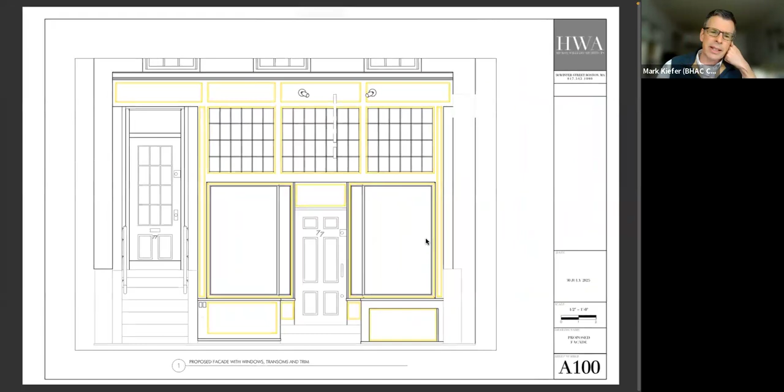Okay, hi Bridget, please go ahead. We've got the plans up on the screen here, so you can probably see. Can you just give us the briefest of recaps, for our commission's benefit and the public, as to why we're here and where we are in this process? Sure, go ahead.

Okay, so this is the work that was done on the store on the facade previously, and our application seeks to change this back to something closer to what was there. I think one of the objections of the commission was that the detailing was not correct, and the elements of the storefront were larger than they should be. So if you can show our proposed drawing.

Bridget, while we're doing that, I think Patrick's here by the way. Just again, to quickly recap for the benefit of the commission, to remind everyone: there were other aspects that were previously approved, an extension of the signage, some lighting of the signage. And I think we are getting closer to a revised concept for the storefront. So please go ahead.

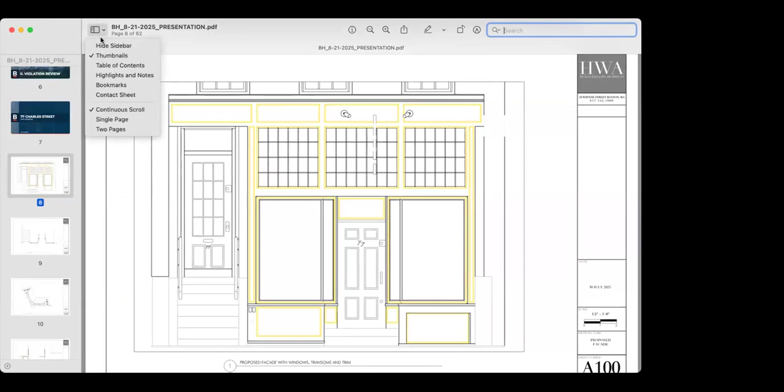In fact, it's even better because it's true divided lights, double glazed, whereas the original was, I'm sure, single glazed. So that was something we worked out with JB Sash, and I think others probably would have been able to do it too, although they've been especially constructive.

But on the lower part, that was much more difficult. That corner post—the builder and his engineer had an idea that post needed to be much, much larger than what our conclusion had been after studying it. Our feeling was that, in fact, there was no load to speak of on that corner. It was really a matter of glass meeting glass at the corner. Nonetheless, it is double glazed for many good reasons.

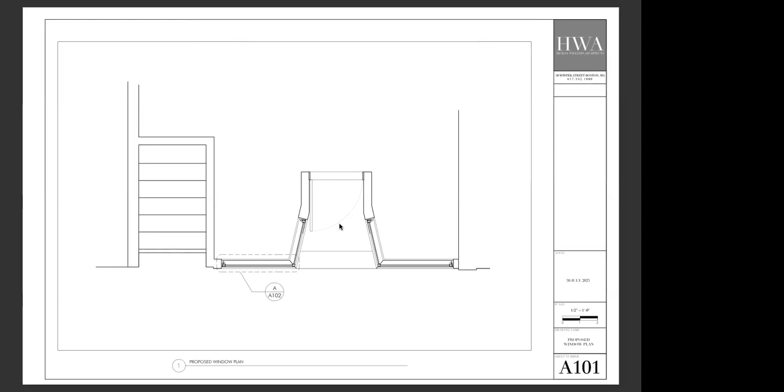So there's a little bit more complexity in such a joint in double glazing. However, we've pretty much been able to achieve a similar appearance to what was there way back in time, which was approximately a fair amount under 2 inches in width in each face of that corner post. There's also the dimension of the sash, but the post we were able to reduce by pretty close to a third.

This relieves the design of something that many people in the original hearing thought was disturbing and aesthetically unacceptable, also in contradiction to the historical nature of that facade. So I think we've gotten back to something that, even though there's an aspect of artifice to it, because the double glazing is a very different proposition, we've pretty much been able to get it down to a very slender corner.

There are some other differences from the very old design, and that is, rather than having a single transom that went all the way across, we have divided that into 3 parts with separations between them. It was a bit pragmatic to have pieces that could be easily done, but also proportionally relate to the rest of the building as it was and as it is. So it's a relatively minor change, but one that, in our judgment, felt true to the overall composition.

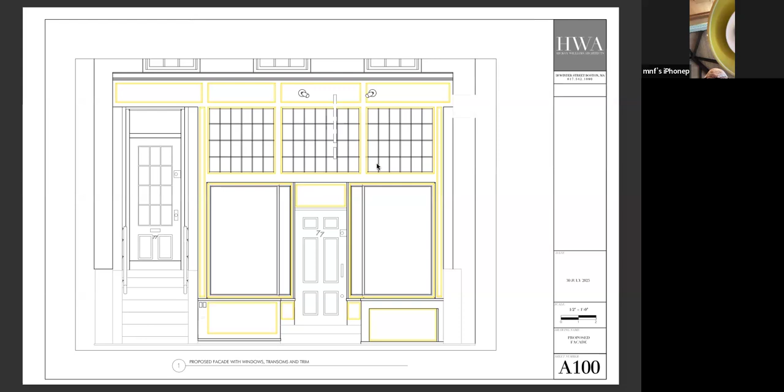I have a question about the transom—you show it 4 lights high, but I thought the image shown before was 3 lights high. Am I wrong? No, you're not. I actually think what we would like is for the transom to be 4, which has a lot to recommend it, since they're basically all square lights. It looks very nice. I'm happy with that. I believe earlier it was 3 lights, but the amount of documentation we have is fairly slender, and 4 lights high seems rather good.

We've looked at many—oddly enough—Irish pubs in Boston, but also in Dublin, and the transom is quite a feature there. It's historically interesting because, even though Jack Kiley and Julianne both very much identify as Irish, the building itself has been many different things over the years, and not, as far as we know, an Irish pub. That's very dear to them if we can achieve something related not only to a pub in Dublin, but also some of the really nice, beautiful Irish pubs in Boston, such as on Upper Beacon Street, and in a number of other locations where the transom is sometimes a feature, but also has a rather delicate polychrome approach.

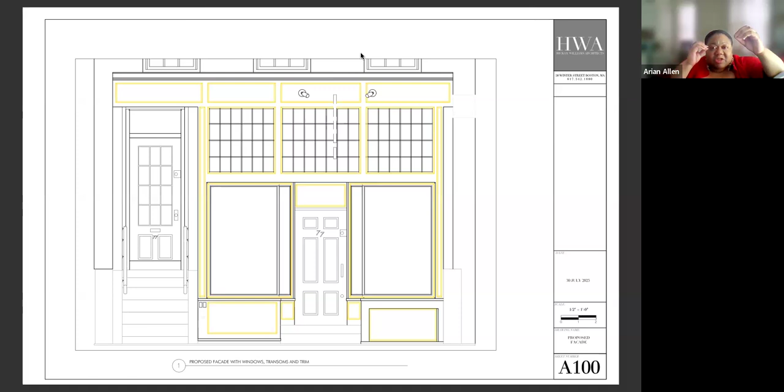I'm sorry to interrupt, I've been dying to ask this question. I appreciate your presentation, but this is a violation, correct? Right now we're doing a violation review. So let's go, because as a presentation this is great, but I want to concentrate. Let's get down to the nitty gritty of it.

What is the actual violation? Is it something that you decided to do on your own, that you did not bring? No, as I said earlier, we were not involved with the project at all until well after the violation hearing. I truly believe in the sincerity of Julian Kiley's approach, that this really was a quagmire into which she was drawn without any intention on her part. When it was called to her attention, she took it very seriously, and she sought out me because of my experience, our company's experience with the historic architecture of Beacon Hill. So our role has been to try to create, not just repair, but to create an appealing facade that draws strongly from the history of this building and others on Beacon Hill.

But to the commissioner's question, what was the actual violation? Let me just get to the screen. So the violation is everything that Patrick is talking about right now. They rebuilt the storefront without permission, basically. It was a repair? No, that became that.

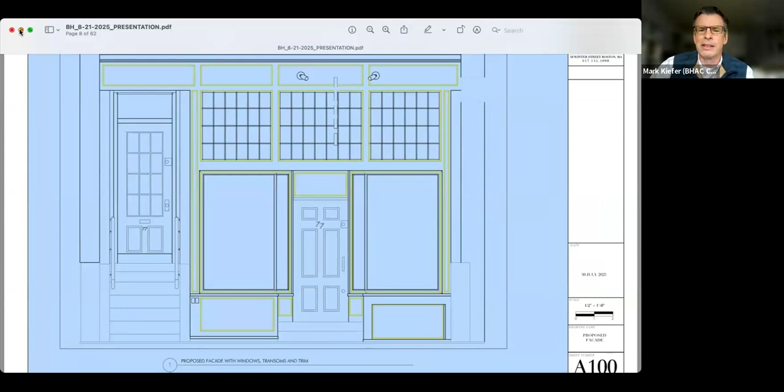What about the transom, that's part of it, correct? Yeah, so the entire storefront is up for discussion because everything was replaced. So now we are visiting the entire storefront and legalizing it essentially, and Patrick is presenting his plans to do so.

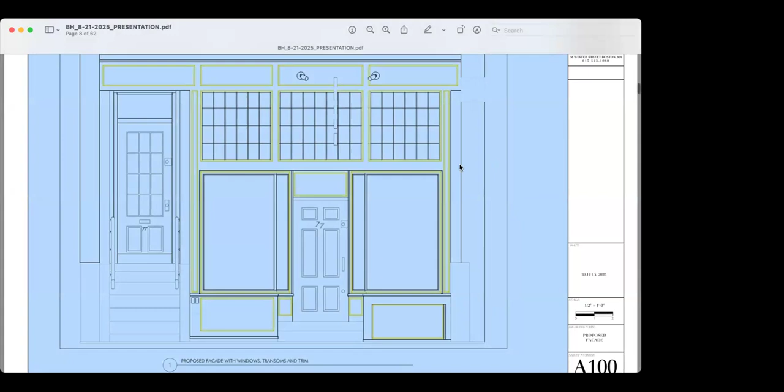And actually, well, I'm not surprising - the commission was very articulate about some of the things that seemed very distasteful about it, and Julian Kiley is very sympathetic with these criticisms. One of which is that the posts at the corners of the corner windows are excessively large.

Unfortunately, the engineer and the builder on their own felt that these were necessary, but our analysis says they're not. That was among the criticisms. I think overall people felt that things were very beefy.

Do you have a detail of the actual corner as you propose to reduce it? That's the critical detail for me, to look at how you diminish, what the diminished corner looks like.

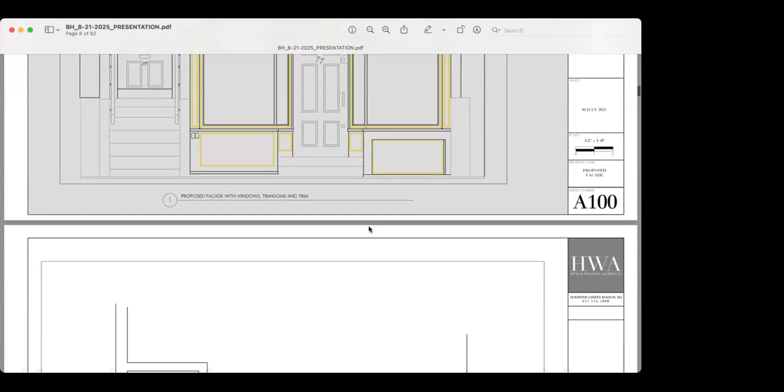I have to admit that has not been confirmed. I believe that that is very, very close, that we expect that we will have. What you see there is drawn as 1.25 inches. It's possible that it will be slightly larger than that, but we're working on it.

At the time we did this, we were working with very good sash companies around Boston who had even done some of the sash on Charles Street. But those windows were in fact all single glazed, with a type of white metal mullion that is no longer used, and the narrowest they could produce was about 4 inches in aluminum. So what we're going for, even though what we're showing there, we felt it would be possible to have a custom made metal sash.

But in talking with JB Sash and Marvin, we believe that we can make a wooden corner that is very, very close to this in dimension. So it's 1.25 inches on each face. That's correct. But that's considerably less than what is currently mocked up on the site.

The existing is around 4 inches, slightly larger. It looks like a 1x4, and inside it has I believe two 2x4s, but by the time it's cased, it's significantly larger than that.

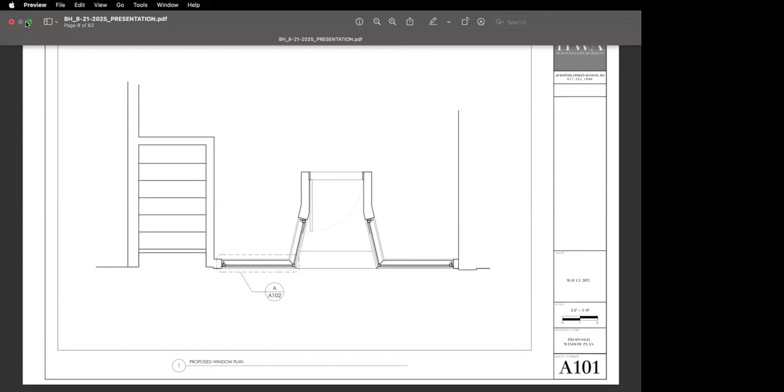What do you imagine the original post was at the corner? Was it round? I actually just by looking at the way these sash were made, and one can even see just down the street, there are several mullions that appear...

made of white metal inside and out, and the glazing either butts or sometimes is held by those mullion pieces. There is one, it's actually really hard to see, but it's about 3 buildings down. I believe it's at upstairs, downstairs, and it's somewhat canted. So it's the closest to this, and it's not really possible to tell what's inside of it, but it would appear as though, again, it's a couple pieces of white metal that have been sandwiched, holding the glass.

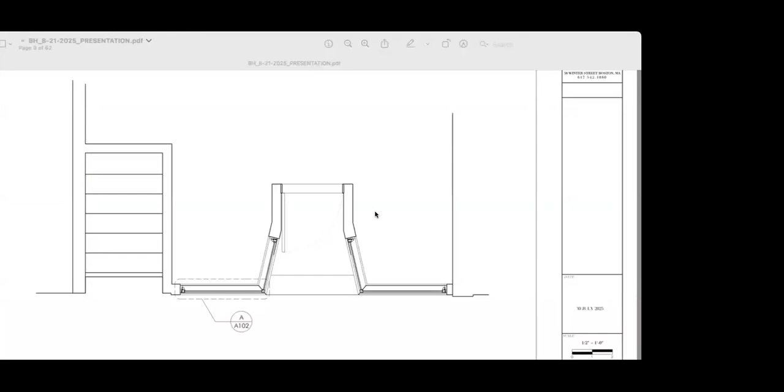But it's single pane glass, so it's a little bit different than what we're doing. What is the thickness of the double pane glass you're proposing? Well, what we're imagining is that the double pane will be 1/4 inch of glass, 1/4 inch of vacuum space, and 1/4 inch of glass. So 3/4 of an inch. Correct.

So you're ending up with still a pretty fat mullion at the corner, but diminished. But actually comparable, somewhat comparable to the appearance of the ones down the street. It's overall definitely beefy. It is a corner, it doesn't have any load bearing requirements.

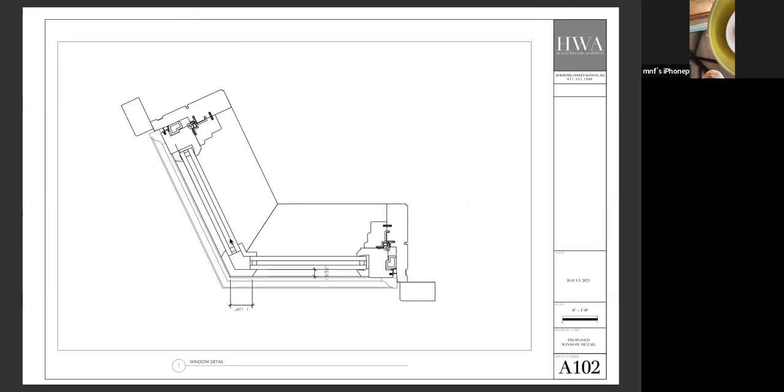I understand. I'm just talking about why it's still as fat as it is, and if the double pane glazing is creating that condition. I think that's a fair statement. I think that the double pane does add to the overall massiveness of it. However, from the point of view of what one can see of the corner mullion, this may be comparable.

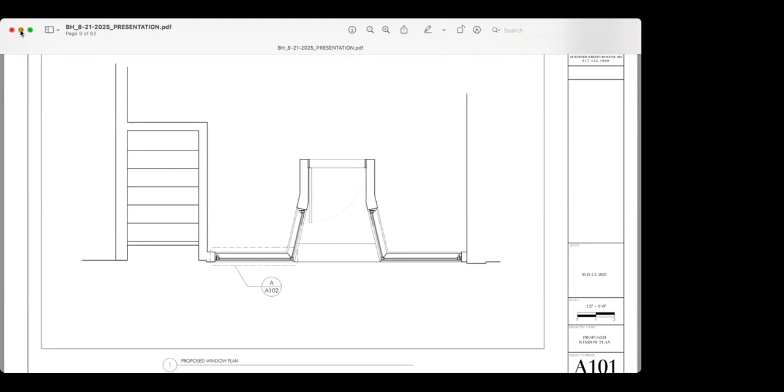I mean, the optimum solution to this problem would be that the corner posts be in metal. I would have liked that. And we did talk with many glazers, but I couldn't get anybody to build it. What I could get was Marvin and JB Sash, who worked very closely together, and basically felt that they could do it in wood.

Now, if it comes to it, if we can do it, what I would like is to have a wood post with a very thin, 16th of an inch, maybe even less, of flashing that wraps it to recreate the metal appearance previously, but also I think it would actually help protect the post, since that situation is one of very high traffic. People handle it, and it would be best if it had some degree of metal protection, even if it's not metal. The design that you see, I thought I could have that fabricated out of solid metal. It didn't seem to me like a huge project, but I have not been able to find anybody who will do that for me.

Okay, thank you. So, to sum up, I think the bottom line is what was there before, the actual wood was thinner than what they're proposing, but there was a pretty wide piece of metal flashing on either side. So the total expression of the thing was probably bigger than what they're proposing. So it's six of one, half dozen of the other.

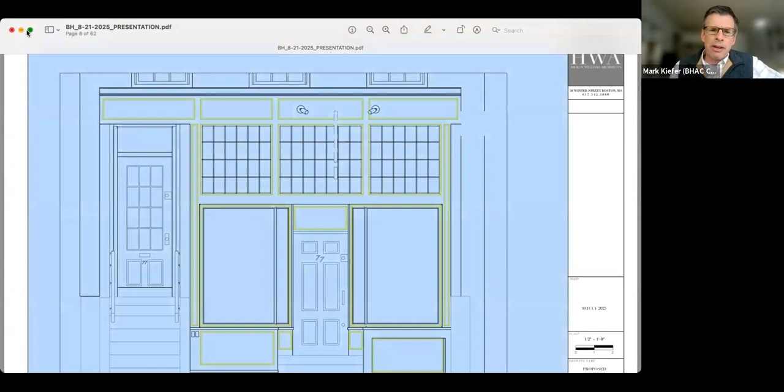Okay, thank you, Patrick. We'll come back, we'll circle back and debate this, of course, but we appreciate all the information and very much your efforts to be responsive to our concerns and make this thinner and try to restore at least the spirit, if not the exact design, of the transom lights. Again, we'll talk the specifics in a moment, but for the moment, why don't we take public comment?

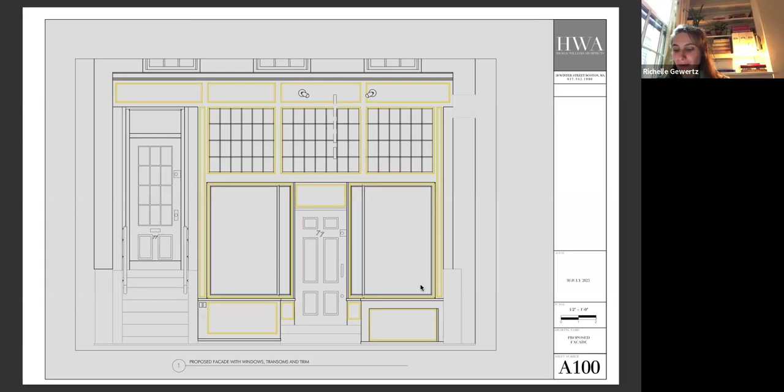Richelle, go ahead. Hi, Beacon Hill Civic Association. We oppose ratification of the current and proposed alterations to the unapproved rebuilding of the storefront, as it still remains changed into a completely different style, specifically a British pub vernacular. The modifications and proposed modifications are not an appropriate architectural change to this building and do not satisfy Guideline A4, do not duplicate the original trim as specified by Guideline F2, and do not match the original features and composition, design, color, texture, and other visible qualities as specified by Guideline A2, especially the tripartite zones with golden borders that do not evoke the prior uninterrupted band of fenestration condition to meet Guideline A3. We do not appreciate the return to thin corner mullions at the storefront. Thank you.

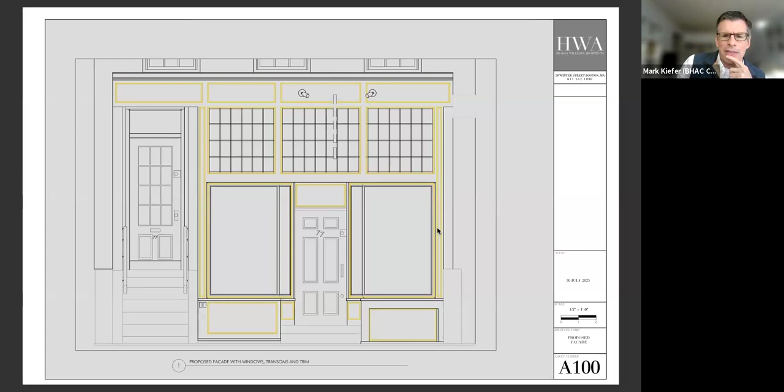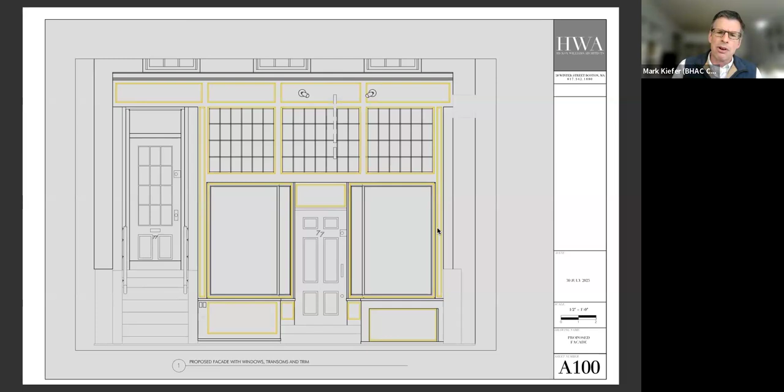I guess, to my view, I think I'm satisfied with the result that we have here, particularly given there's the original wood element in the window, but then there's the effective width of it, which was made considerably larger by the flashing on the inside. And I think what we've wound up with—I don't know for certain, but just looking at the images Nick had up there and the drawing we're looking at right now—I think the net effect of the proposed rework of this is one that gives us an effective width that's pretty close to what you saw before, given the wide flashing on either side. This, I think, frankly, would be a neater appearance if nothing else, because that silver flashing kind of stuck out from the otherwise black wood element and so forth. But with that, let me ask my colleagues here.

Commissioner Feingold, you were just talking about this. Does anyone have a different view of this, or what do you think of Patrick's revised design for this corner? Any dissenting views?

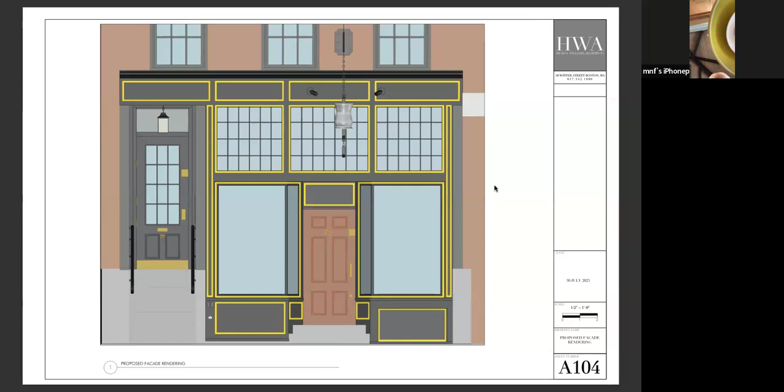This is Feingold again. Yeah, please. I had exhaustive questioning before. I think he's done the best he can, and I think it's fine. Yeah, that's kind of where I come out as well, under the circumstances.

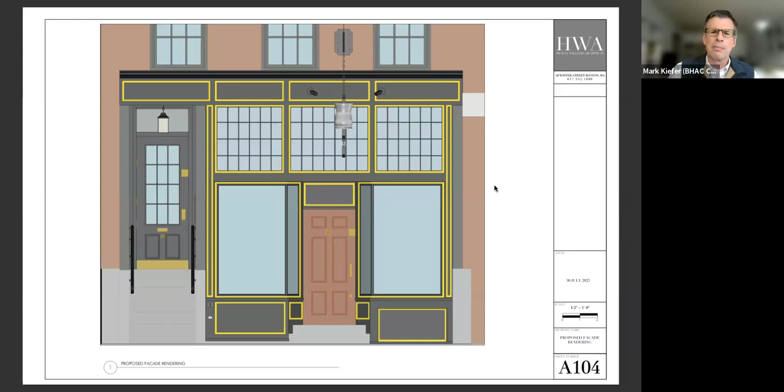Let me just say, I should have said at the outset, this is a violation, and I appreciate the comments of the Civic Association wanting to be pretty precise about how we treat this. But I will say, for my part, I don't believe, in all candor, that there's anything particularly important or historic about the fine details of this storefront. I think the fact that it is a storefront matters tremendously, and I don't believe we would be contemplating something that would rework the building to remove the storefront, or otherwise restore it to an original, residential configuration.

I think the question here is, how important are these details? We've just worried one of them pretty significantly, which we thought was very important, which is the delicacy of some of these elements, which Patrick has taken significant pains to get us closer to. I think that's absolutely a step in the right direction. Because we're not dealing with, in my opinion, a particularly historically significant storefront in its fine detail, I don't believe, as a matter of principle, that we ought to cement in amber a not particularly successful design.

So I think there is room in this case to try to improve it. And I think the transom light, as we discussed in the prior hearing, is an attempt to restore historical detail, or at least make an homage to what might have been a more fully expressed historical detail, but for which there is evidence there was some fenestration in the transom. I think there's room to improve this.

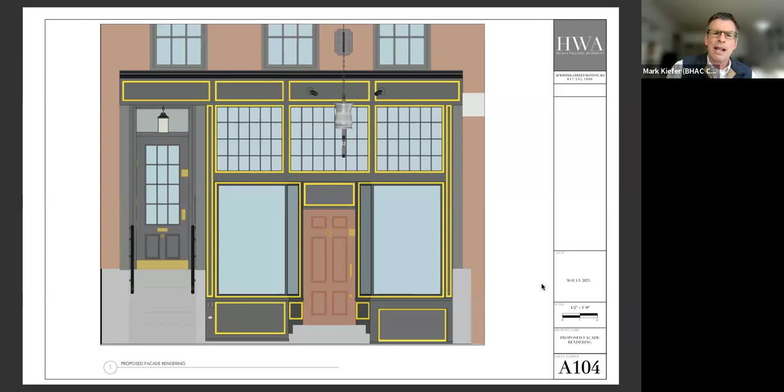Specifically, I'm fine with the idea of bringing back a transom light. I think we've already agreed on that, it's just a question of how to do it. Patrick, Nick and I were talking, and I appreciate your comments earlier about how many lights there should be. I won't speak for Nick, but I think we were kind of persuaded that a treatment more analogous to what's next door, where it's one small light, a double light, and then another small light, might be less busy and more appropriate.

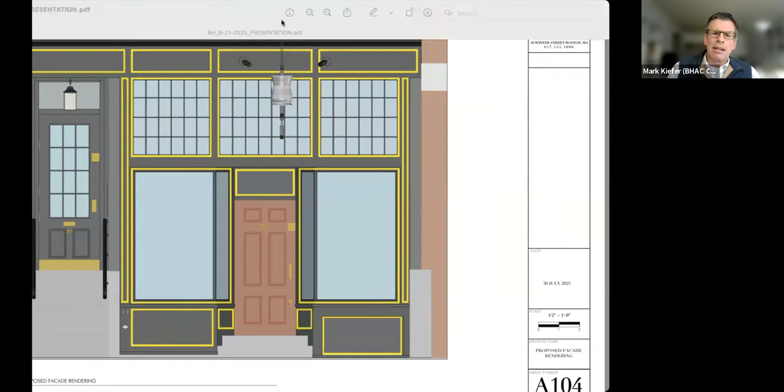I think this is informed conjecture, but maybe we can get the photograph back up again, Nick. The building next door, these storefronts, we can probably conjecture were added at the turn of the 19th to 20th century. That treatment of the square light, then a double light, then a square light is at least vaguely evocative of the kind of arts and crafts style fenestration you see in a few places elsewhere. Thanks, Nick.

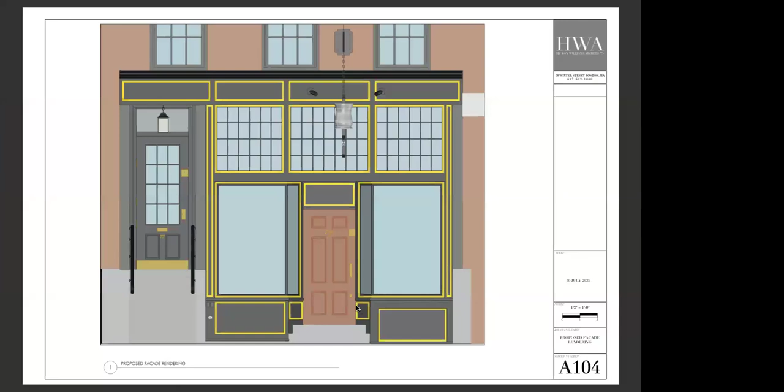Well, it's on a very, very light molding, basically essentially 3/4 inch. And what we would do ideally is have the sign painter, who did a very beautiful job that can be seen at the existing pub, add more in the form of the sign that's going to be reinstalled and added to with the allusion to the daughters of Jack Collie. So it's meant to be a very, very light trim, not meant to have the kind of bombastic weight of what I think you're alluding to in some of our public buildings. This is really like a pinstripe, more of—

Why do you need it at all? Well, it relates to the history of the Irish pub. It's beautiful, and I think we would execute it very, very nicely.

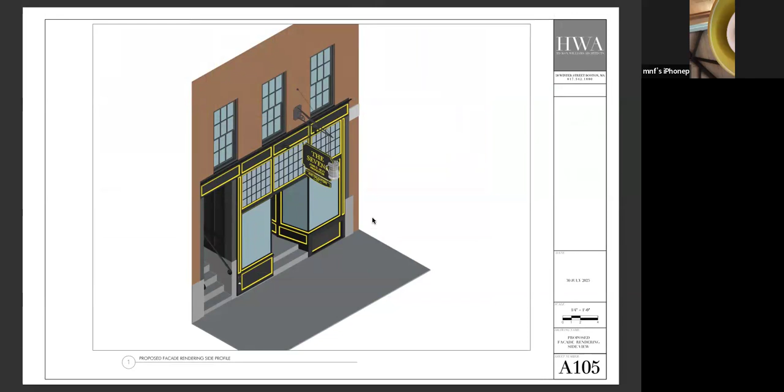Okay, thank you for that explanation. I'm finished, Mr. Chairman. Okay, thanks, Commissioner Feingold.

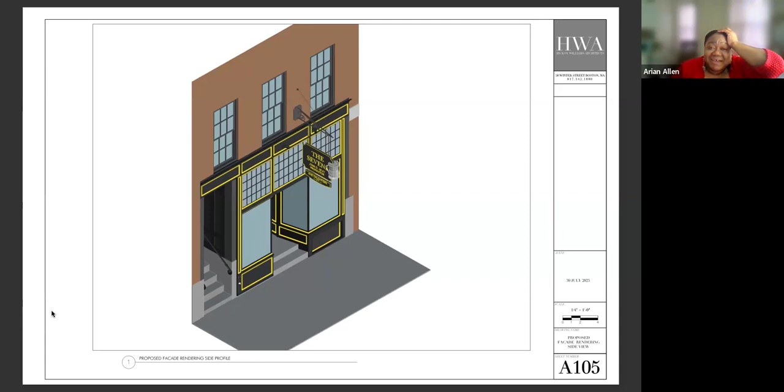Okay, so I would say that since we're a bit at a loss at this particular site, a lot of the things that should have been known about have been removed. He's trying his best to make it as close as possible to what might have been there. The idea of the classic pub—this is Boston—I think to have something that looks close to an Irish pub in an old part of Boston makes sense. I'm not against it.

Okay, thank you. Patrick, let me just ask—and I appreciate this is perhaps an artifact of the rendering—but it looks quite yellow in the drawings, and we'd obviously want to see a sample of this before you ever paint out the whole thing. Maybe, assuming we're okay with this as a group, we'd want you to just paint out one of the moldings so we could see it.

We would definitely be very open to doing a mock-up of the individual pieces. We have submitted the actual color, because oddly enough, even gold has a number attached to it in the hierarchy of modern paints. But more relevant to me is that the people who made the sign did such a beautiful job, and our idea is to have them simply do the work because they know how to do it. Yeah, and it's this metallic paint, so it's not actually gold, but it looks like gold.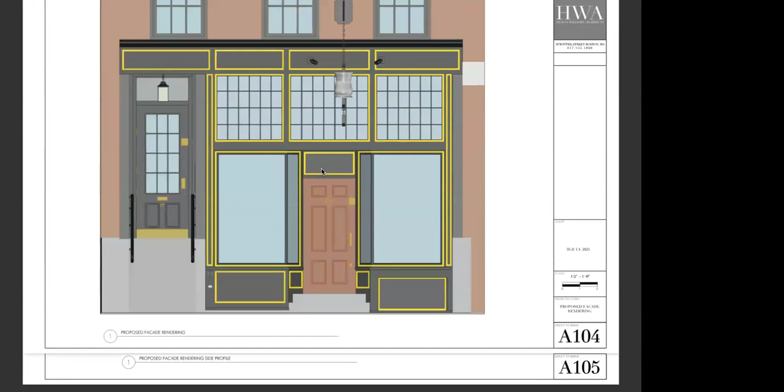Can you tell us quickly, if we go back to the image showing the outline, how wide are we talking about? Well, I believe we've given you a drawing from Anderson McQuaid of their molding, which is a stock molding. There are some instances where we might have to shave it down, or butt it together, so it wouldn't be absolutely stock. We'd need the latitude to play that a little by ear, but we'd try to do it in the most harmonious way possible.

I haven't spoken with the sign painter about this, but I would not be averse to having him take a strip of the molding, gild it, and deliver it so we can hold it up on the wall—maybe a few pieces—so we can sense the composition. I think we'll find it's very delicate. We had no ability to draw that; architectural drawings are much more clunky in this era of object-based three-dimensional presentation. It used to be we drew with lines. Now it's very hard to achieve that kind of finesse, but this is the way we make things.

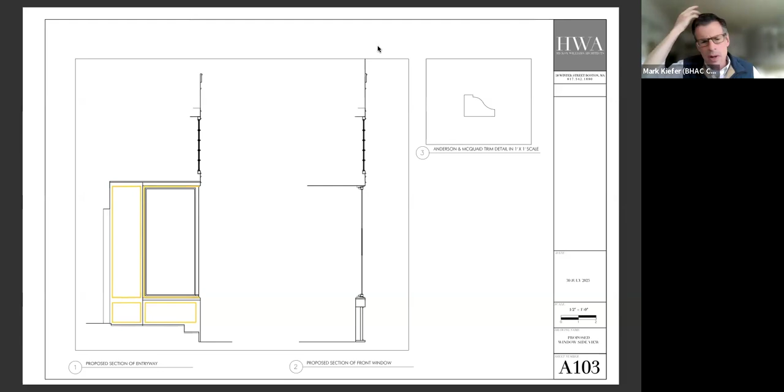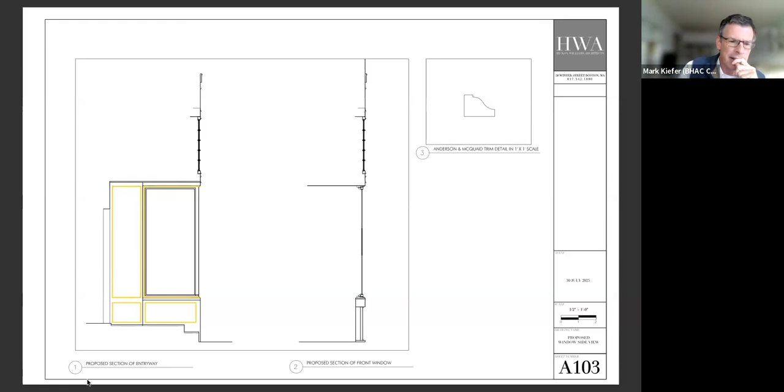Okay, so with respect to this, Nick, can you remind us—there's certainly not another example of exactly this kind of treatment on Charles Street. There aren't really any other pubs of this nature, but I appreciate this is a particular architectural stylistic treatment common on English or Irish pubs. The question then comes down to its historical appropriateness. There are a couple of other examples on Charles Street of facades with two different colors—window trim being one color and a frieze above the storefront another—but they're relatively rare.

Nick, did you want to remind the commissioners of your recommendation on this feature? We're talking about the gold trim. Yes, I think it's fine. I think we should see a mock-up of the color, but overall it provides a nice contrast to the monotone color that was there before, which was all black. From a staff perspective, I'm okay with it.

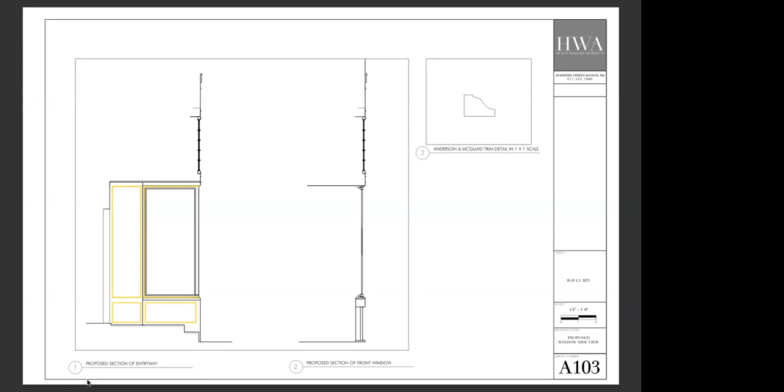That's another important consideration. This facade is otherwise utterly monochrome, all black, so this is an attempt to add, if not restore, some additional detail in the form of color.

The remaining item is the electrical cover. It was there, and it's been put back in the middle. It was in the other spot originally. Strictly speaking, it was an element that historically had been there for a long time. A lot of these things are no longer in use, but they're nevertheless still there and do reflect a history of the building. I wouldn't necessarily use Commissioner Feingold's word of calling it a fake. It's certainly not doing anything now, but it did serve a function for probably a long period of this building's life. It's embossed metal, an interesting feature, and it does speak to the evolving history of the building. So I would prefer that we keep that.

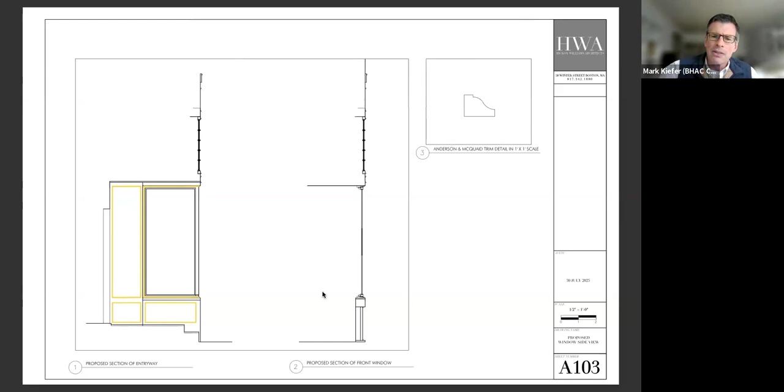Since it's not doing anything, I guess it can be put back in its original location, Commissioner Feingold, if you feel strongly about that. But it is where it is now, centered on the building. Anyone else have a strong view on that, or a view at all? It's not shown in this diagram, but it is there on the building right now.

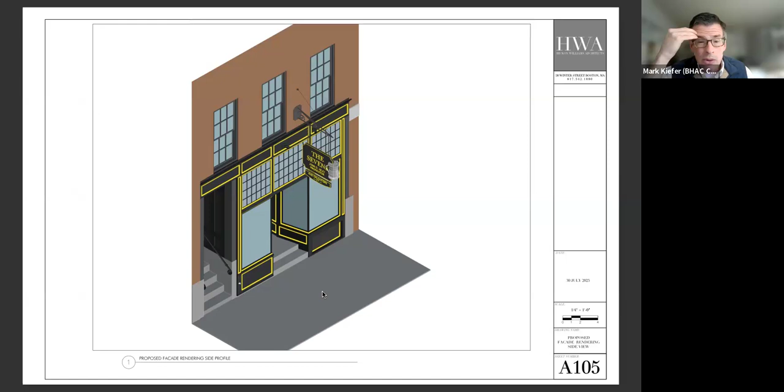To move this to a conclusion, unless I hear any other further views, let me back up. Nick, if we approve what's before us today, does that take care of the violation entirely, or is there anything else? You just motion to approve how you want, and also motion to ratify the violation in the same motion. Okay, so I would move that the violation be dismissed and the application be approved with the following provisos.

Number one, that the exact specifications of the window element, the corner window element, to the extent they may differ in the final construction, be supplied to staff for approval in advance. Number two, that the transom light be revised to reflect the agreed upon revised configuration of the double height light in the middle and single height light on top and bottom, such that it is a 3-light vertical configuration, with the middle light being twice the height of the upper and lower lights, and that the painting of the molding, the gold painting, a sample be applied and approved by staff in advance of completion of the work.

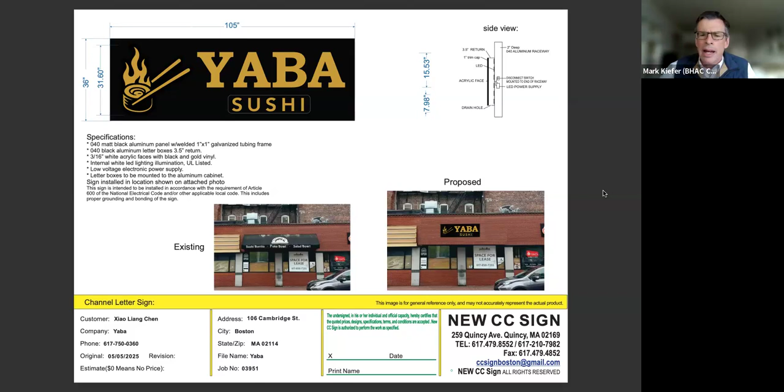So I just want to say at the outset, thank you very much for working with Nick to revise this design in time for this hearing. We appreciate that. Can you give us just a quick summary of what you are proposing?

I think that's the slide for the channel letter sign, right? Yeah, sorry, I just realized that. Let me just pull up your updated application. You did send us over an updated one, so let me get that for you. My apologies. So this is on Cambridge Street, just to orient everyone, near the intersection with Bowdoin Street, just two businesses down from the corner, now recently added to the historic district, so this is rightly in our jurisdiction. Got it right here, all right.

And this will constitute the only sign on the building, is that correct? They have, I think, three different businesses in this building. One is the Dunkin' Donuts on the right hand side. For this business, yes, just for this business. Right, so it'll be the only sign for this business on the building. Yes.

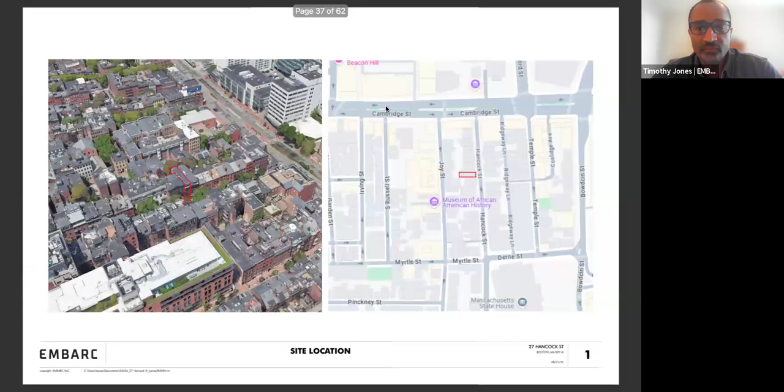There we go. So one of the things with 27 Hancock is that it's a mirror image of 25, which is just to the right side of it. So what we're proposing to do here is, since they were built at the same time, use the same colors and coating that's on 25 for 27.

As part of the restoration of the facade, we're replacing the existing windows, all windows with the exception of the window on the first floor. I want to clarify there, the first floor window we're going to scrape clean and repair the existing window trim, and the intent is to keep that window. The remaining windows on Hancock Street will be replaced with the JB Sash, JB Proper Bostonian wood windows.

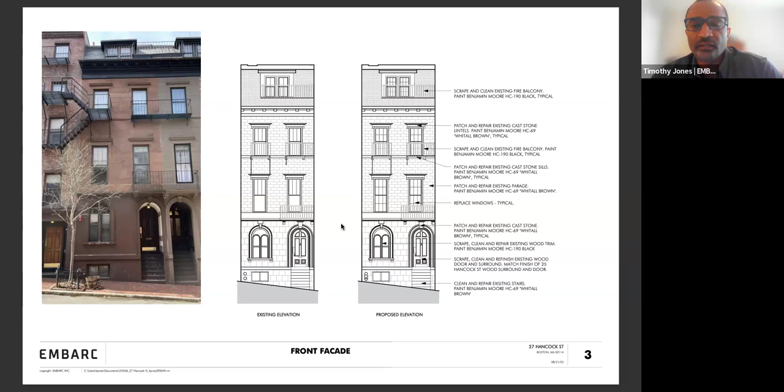We're scraping and cleaning the existing fire balconies. If you go to the next sheet, there we go. A little more detail in terms of what we're planning to do at the entry. Again, I think I sent some photos, and I have some other photos of this.

The entry door, comparing this is 27 here, but 25, which is right next to this, the wood entry surround is unfinished wood. We're proposing to do the same thing here, to scrape the existing white paint off of this entrance surround, and refinish it similar to 25.

We're proposing to install the buzzer that's shown here, the exterior pendant. These are the colors, HC 69, which we're proposing to use on all the patching and repairing of the lintels, the cast stone, and the sills. And HC 190 is the color we're proposing to use at the cornice, as well as on the fire escapes.

Okay, very good. Just a quick question, Tim, on the entry. We'll come back to this, but just to clarify the refinishing of the surround, are you going to do the door similarly? Yes, the door is to remain. We're going to clean, scrape and clean the door. Is it stained or painted right now? Currently, I believe it appears to be stained. Okay, I just couldn't tell from the photo.

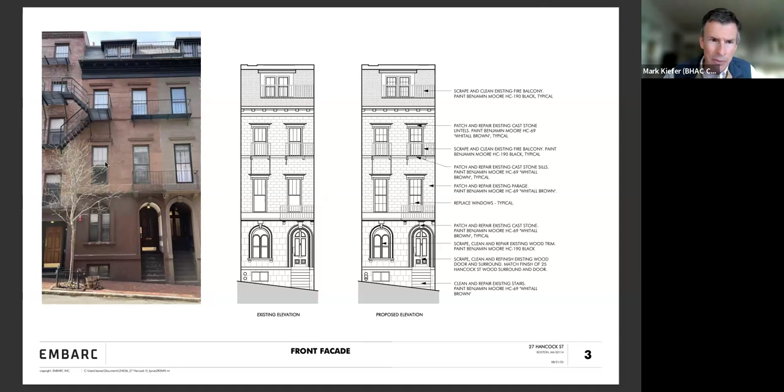Okay, so again, just for clarifying questions at the moment, commissioners, anything else we need to better understand what's proposed here? No? Okay, Tim, I didn't mean to cut you off—is there anything else in the proposal that we haven't touched on? No. Great, okay, let's take public comment.

If you want to be heard on the record, raise your hand in the Zoom. Okay, let me just see. The first up we have is Maureen. Maureen, go ahead. Yes, hi, my name is Maureen Collins. I actually live at 25 Hancock Street, apartment 1. I'm the only owner occupant in the building, so really glad to be invited to join.

And I was just wondering, in terms of having the same paint colors and mimicking 25 Hancock, do you plan on hiring the same masonry company to be able to do the same mirroring and replication? And is there anything that I can do as a neighbor to help facilitate that?

In terms of matching, we're not certain about hiring the same mason, the same company that did the work for 25—not certain who that person is, but we'd likely bid this out. What we did is match the colors. We had the paint chips and went out, and you may have seen us out, trying not to be on your stoop, but we did match the color, the black and brown, to your building, which is great since these were the way they were. 25 was restored, so we thought, and the fact that they're mirror images of each other, it's quite easy to use 25 as an example of what we want to achieve at 27 in terms of the aesthetic and finish.

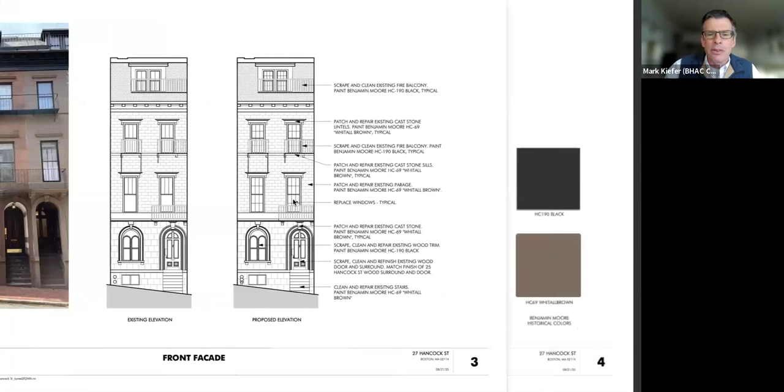It appears to be darker on 25. It's sort of the same color right now as the surrounding window trim, but the one on 25 appears, looking at it on Google Maps, to be darker. Yeah, there you go, on the right. What's the plan there in terms of the actual window sash and that column detail? We'll want to match that. The plan will be to match the color there.

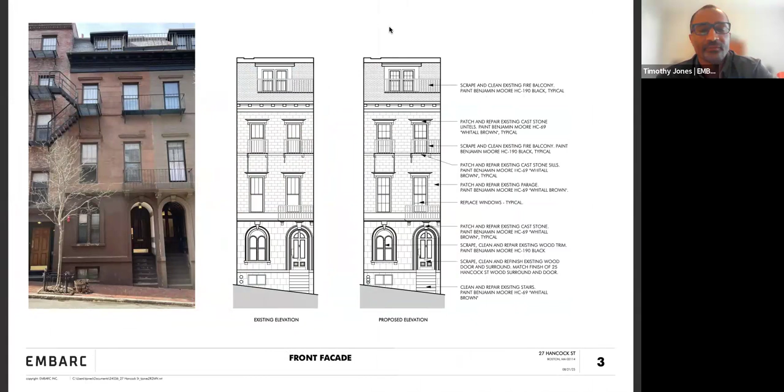Good eye - we didn't catch that that was identified on the plan. Right, on the proposal, great, thank you.

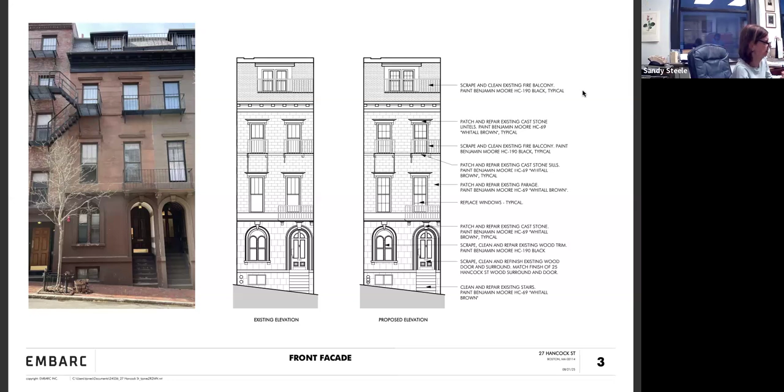So just to recap, we're going to repaint the facade, refinish the entry in both cases to match the twin building at 25 next door, and install a light fixture, door hardware, intercom panel, and new windows.

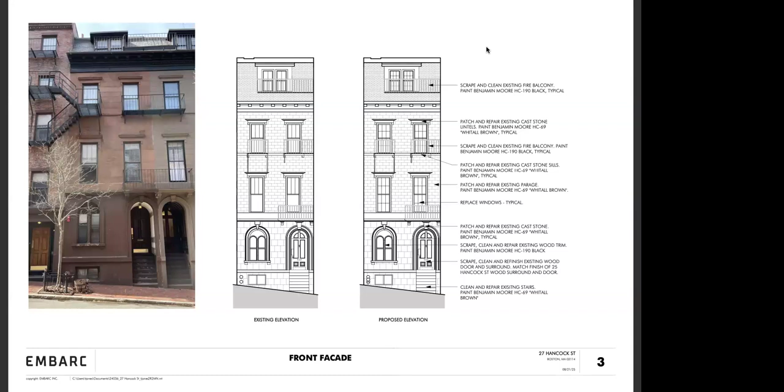Nick, you are satisfied that these windows are not historic, is that right? Yeah, I looked at them up close, they're definitely not historic. The pattern is unusual, so I think we'll need to discuss the lights, but they're definitely not historic. Right, let's take that first, because I think that's the one thing that stands out as requiring some more attention here.

I think the windows are not particularly old or historic, and our objective is always to think about what's appropriate. Our guidelines don't define historical and architectural appropriateness, but there's a theme of being consistent with the original style of the building, or the style as it's been modified. Windows are the most common modification we see; it was not uncommon for buildings to have windows replaced to an updated style. This building is otherwise a pretty remarkable specimen in terms of its originality, one of several buildings of this distinct style on Hancock Street, and it's survived pretty much intact.

So in terms of what would have been on this building originally, given its vintage, we can be pretty confident they would have been 2/2 and not 6/6. Personally, I appreciate the impulse to mirror what is clearly a twin building built at the same time, and what would have been, I think we can be very confident, originally identical.

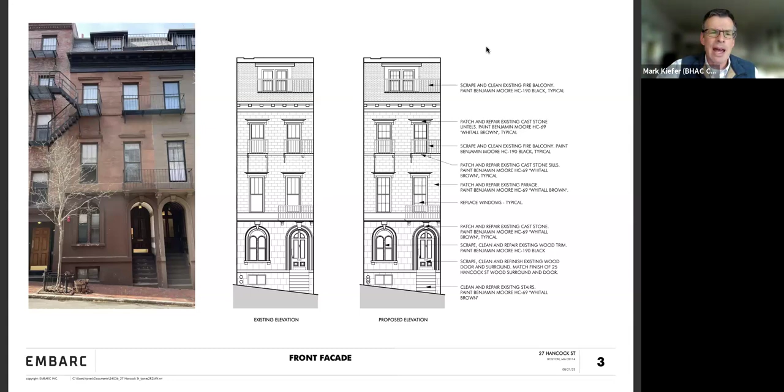In terms of the other added features, the intercom panel is a design that has been approved in the past. It's on the approved list, right Nick? It's actually our preferred intercom system, and it's got the brass plate.

Okay, so let's see. Light fixture, I'm okay with that. Any other views on that? Door hardware looks good, numbers look good. Excellent. The paint colors, I think, are fine.

Quick question, Nick - Commissioner Allen - how is staff feeling about this? Staff feels exactly as the commission feels about everything on this particular project. So I think I'm okay with everything thus far.

I think the windows, in terms of the design of the grid pattern, could be 2/2, but could also probably be 1/1, so I'm fine with 2/2. Does anybody have an opinion about this? Okay, anyone else? I motion to approve as submitted.

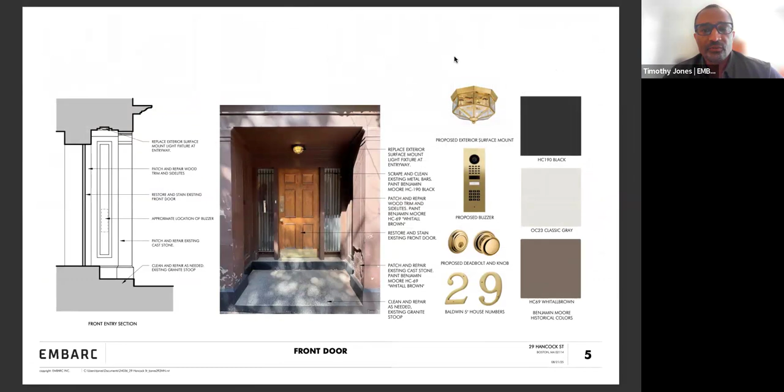Going into a little more detail at the entrances. 29 Hancock has two entrances to the building. This is what we consider our primary entrance, closest to 27, just to the right here. We're proposing patching and repairing the existing stone and the trim around the entry door, replacing the exterior surface mounted light, adding a buzzer, replacing the deadbolt and signage, the house numbers. For the coating, we're listing the Whitall Brown HC69 at the entrance, and the black HC190 for scraping and repainting all of the fire escapes.

Our next slide shows the second entrance into 29, just to the left of the primary entrance. The first floor has 2 units, and we're trying to make them handicap accessible, so we're creating an accessible entrance threshold for this entrance. That's going to require us to drop this granite stoop down about 6 inches. The original intent was to replace this door, but we're now deciding instead to keep the door, drop it down, and add trim to the top to pick up that 6-inch differential from dropping the sill. Same door hardware as the primary door, all unlacquered brass.

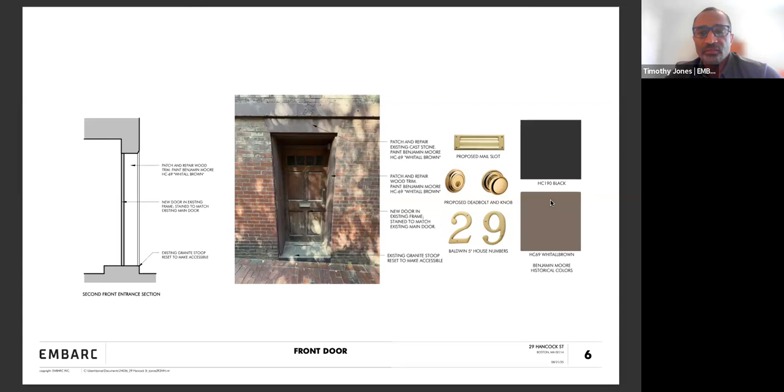I think we have one more slide, which is our windows, the window replacements. Again, all the windows on Hancock Street will be replaced with the JB sash, JB Bostonian.

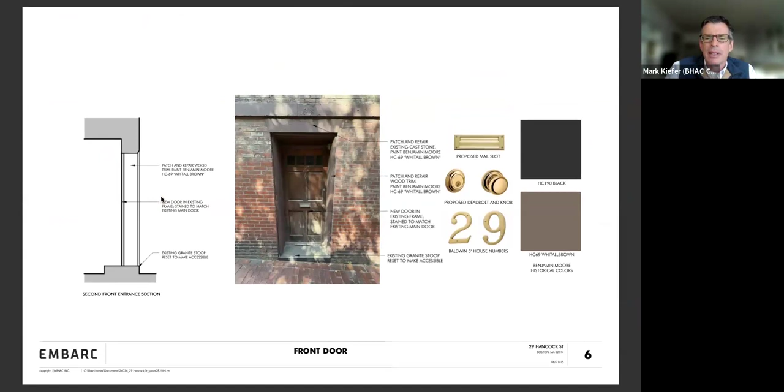Just for clarity, tell us the light pattern you're proposing. If you go back to the elevation, I think I saw a few different patterns. It was 2/1, sorry, 2/2 here. On the third and fourth floor, is that just an artifact of the rendering? Because it looks like 2/1 there. Yeah, there's a line, I'm sorry, I think we should have lightened this up. There should be 2/2 throughout.

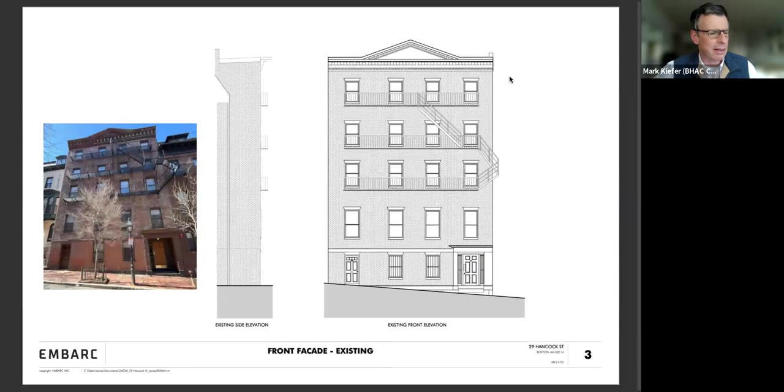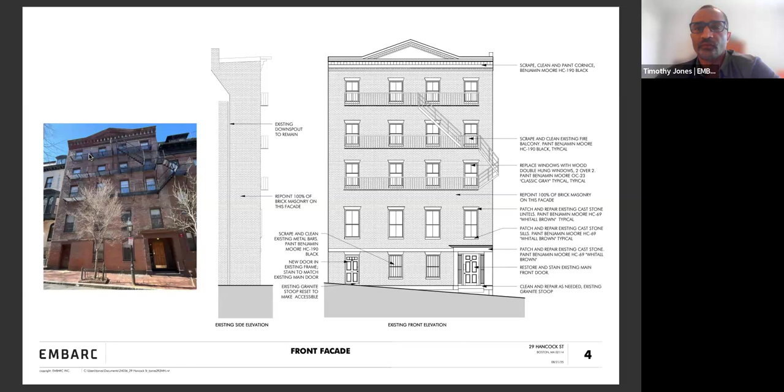And then there's the cornice, you're going to scrape and paint, and you're proposing to paint that black, is that right? That's what we originally proposed. I think we're now considering going with the HC69 for that cornice, but we're open to another color if there's one preferred. Okay, I think that's an interesting and important feature we'll want to talk about more. But for the moment, what happens to the fire balconies, are you removing them? No, just scraping and repainting those with the HC190 black. You're not able to get rid of those? The balconies? Yeah. No. Okay.

Let's see, anything else? Okay, is that pretty much it? Yes. Great, okay, thank you.

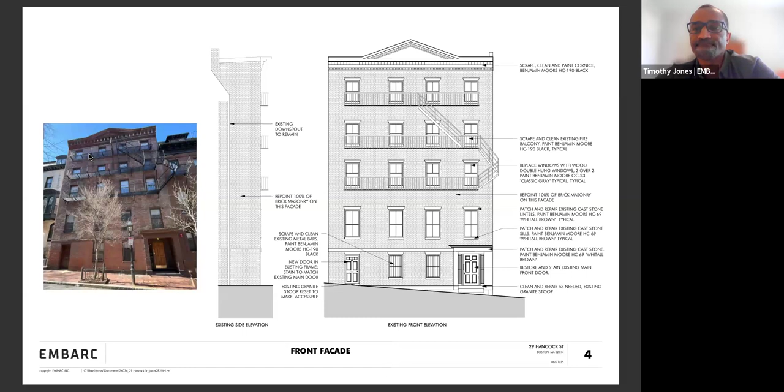Mark, just before I do, just make a note when you discuss the masonry to talk about the differences in the masonry on the front facade because of the alteration of the building in the early 20th century. Yes, so just make a note of that to discuss.

Okay, first up we have, we'll go to Christina. Christina, go ahead. Hi, my name is Christina Madek and I represent Homes on Hancock, and I just want to voice our support for this proposal. Thank you, Christina.

All right, and then next up we have Rochelle. Rochelle, go ahead, Beacon Hill Civic Association. While guideline A7 prohibits changes to existing door openings, we do not oppose lowering and resetting the threshold to meet ADA compliance, as the historic fabric is not being destroyed and can later be returned to its historic appearance, and the door itself is not historic.

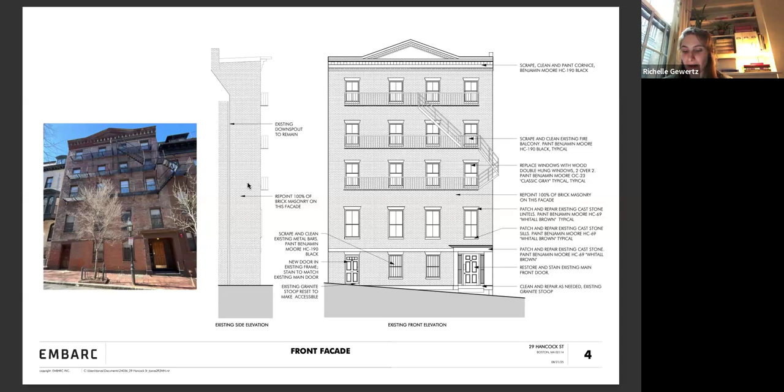Assuming the windows are documented as non-historic or beyond repair, we do not oppose replacing the windows with the JB Sash proper Bostonian product, known to meet guideline D6 for insulated glass, and agree 2/2 is a more appropriate configuration unlike the existing 1/1. We oppose painting the cornice black as it does not satisfy guideline G1 for historically appropriate paint color, and the same or similar brown color as masonry would be historically appropriate, as these tenement building cornices were meant to appear as sculpted wood or stone while actually being made of stamped metal.

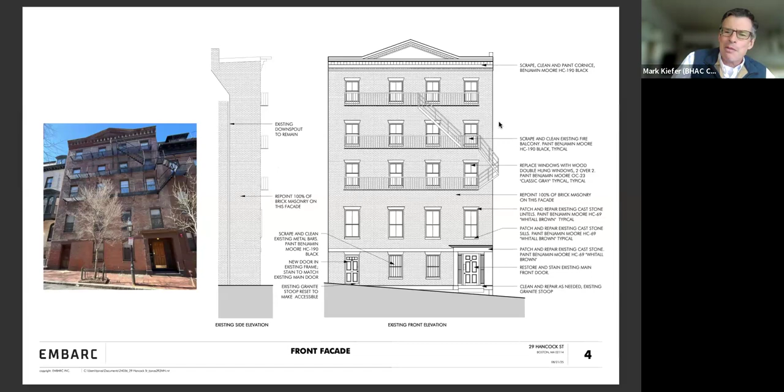This is a very, very interesting building, maybe more so than it might look like at first blush. But if you look closely, you see this is a very early building, a federal period building. It's coarse brick and Flemish bond that evidently was altered dramatically, probably around the turn of the 20th century, to re-envision it as a tenement apartment building, when we can probably imagine that an additional story at least was added, and this rather elaborate, interesting cornice.

It also has, and the analogy here would be something like 2 Chestnut or 57 Mount Vernon, roughly 8 or 10 foot section that was probably added to the left. So you can sort of see that original 3-bay house peeking out from under this much larger facade. You can see the difference in the color there, the darker brick to the left, which is in common bond rather than Flemish bond. Yeah, there's a nice outline.

There's your original building below and to the right of where Nick is indicating there. And then everything above and to the left of that is likely the later early 20th century addition, probably to close the gap between what was a later building added. This is exactly what happened at 2 Chestnut and 57 Mount Vernon, to close the gap with that building that had since been built next door.

So I think that's important to how we think about both the cornice and the windows, because clearly the expression of this building, while its early federal period DNA is observable if you look closely, it clearly reads as, again, consistent with our guidelines, this later renovation, the style of its later renovation, which is this turn of the 20th century tenement apartment building and so forth. So I think 2/2 windows are appropriate for that period, and since the building really does emphatically reflect that style rather than the original, that's 2/2 be most appropriate.

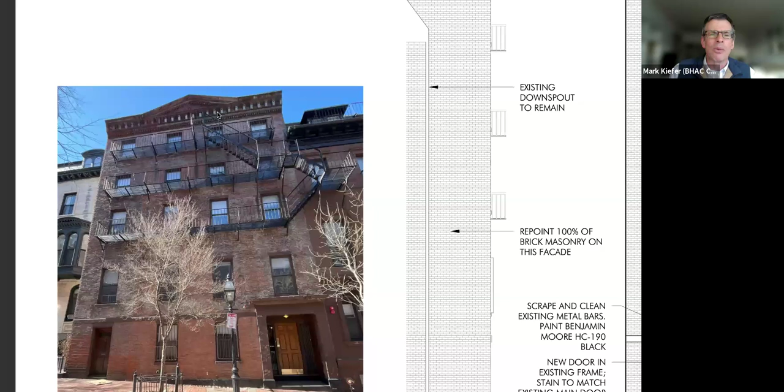Tim, do you have any sense? I don't know if you've been able to get all the way up there, but of what's on there now, color wise, or what was on there and may have flaked off? Yeah, it's hard to.

We've been on the roof of both of these buildings, but it's hard to get a clear view, and even looking up from the 5th floor of 29, it's hard to identify what the original color was. It does have a masonry sort of reddish brown tint to it. It's spotty, but it's clear that it was some reddish brown color originally.

There's a nice run of buildings at the far end of Phillips Street where it intersects West Cedar, on both sides, many of which still have a similar cornice. There's not an obvious unitary choice in colors, since they've likely been modified over time. But given evidence it once had something like a masonry color, that would be a good place to start, and as firm a conjecture as we can make, absent direct evidence from paint analysis.

Let's see, Nick, what else did we want to talk about with respect to the masonry, just to remind me again? The other thing is the lowering of the threshold for the door on the left side, right?

Right, so I appreciate Richelle's comments from the Civic Association. We do have a guideline about masonry openings. I'm not sure it defines the full range of contexts it's meant to apply to, but it's worth noting. This is a marginal enlargement, but quite modest, and as Richelle pointed out, completely reversible—it doesn't destroy any historic fabric, and the door's not original.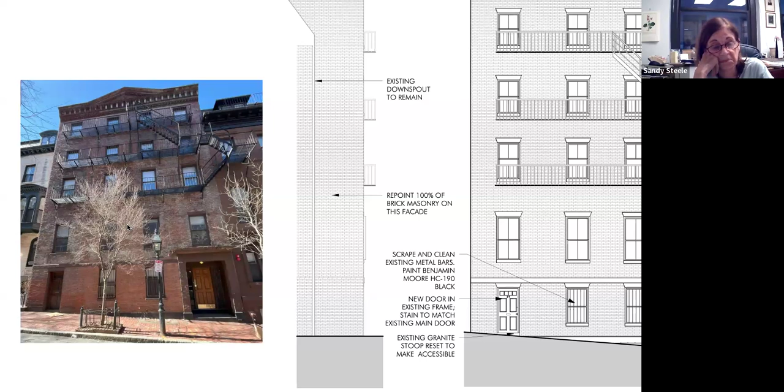Anything else, Mark—you wanted it to be, what was the rough idea of the shade, or are we giving all the decision making to me? I think the guidance would be, as Rochelle nicely articulated, taking cues from what's there now, with the objective to match or be harmonious in tone with the masonry—so a brick-like color or something to that effect.

Okay, anything else? Any concerns or questions about any of the other details? Again, the windows will be 2/2, just to clarify. Yes, there was a little issue with the drawing, but that was intended to reflect 2/2.

Okay, I think with that, I will move as follows: that the application be approved with the following proviso, that the color of the repainting of the cornice be revised to reflect a color consistent with the existing color, specifically to match or at least harmonize and be consistent with the masonry, with the final color and a sample or chip approved in advance, delegated to staff.

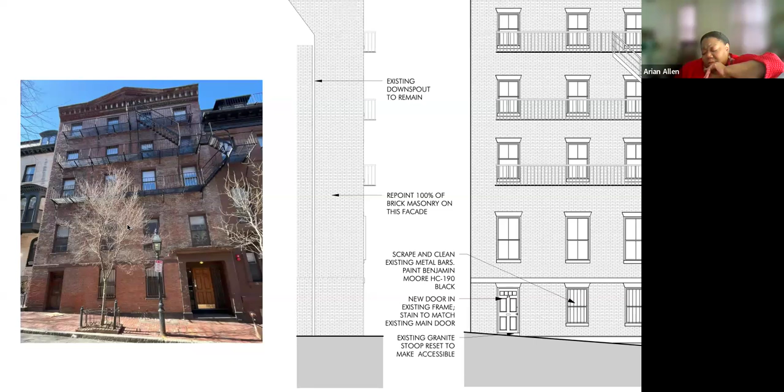Agreed. Okay, is that a second? Yeah, I'll second it. Okay, have I missed anything, Nick? Anything else?

Sorry, just revised drawings for the left side door, because they said they were going to add a piece of trim to the top, so we would like revised drawings for the final design of the left side door submitted to staff in advance of construction.

Can I just get a second nod to that. Thank you very much, Commissioner Allen. Okay, with that revised motion, we will vote.

Commissioner Allen, aye. Commissioner Feingold, aye. Commissioner Kiefer votes aye, Commissioner Steele, aye. Great, thank you very much, Tim.

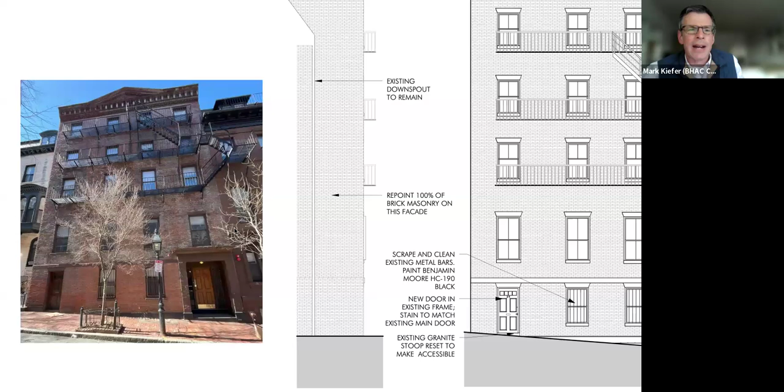Appreciate all your work on this. I know this has been a long time coming. I will say, for the record, as I understand it, this is now the final resolution of the affordable housing component of the large development of the Archer and Donahue buildings that were sold from Suffolk University several years ago and redeveloped. We heard testimony from neighbors that this has been a long time coming, with a lot of effort and input from the community. It looks like a successful resolution of this important issue to bring more affordable housing to Beacon Hill. So thank you for your work and your sensitivity to the requirements of the historic district.

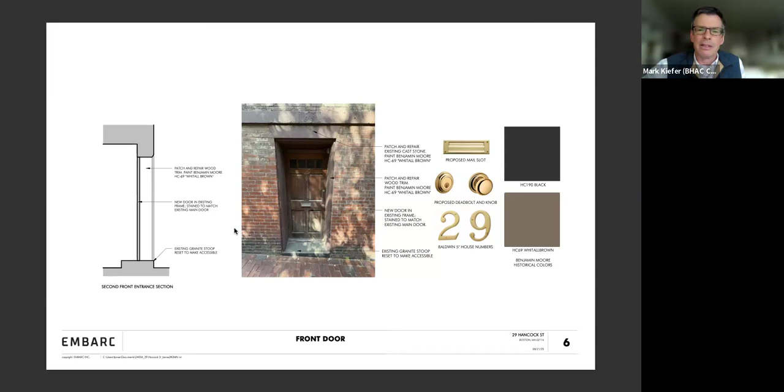Thank you very much. Absolutely. Thank you all for your time. You'll get a letter from Nick with the particulars, any questions follow with him. Thanks. And thanks, Sunith, we appreciate your contacting us. Thank you.

Okay, administrative review. Any comments, questions, concerns, or recusals on any of the administrative items? No. Okay, do I hear a motion to approve them?

You got to go to the public. Oh, I think I've made it a month, literally once. I have not forgotten. Thank you, Commissioner Allen, as always. What would we do without you? Does anyone have a public comment they want to make? If anyone's even left.

Going once, public comment. Okay, hearing none, we'll close public comment. Does anyone now want to make a proper motion for approval?

I motion to approve. Okay, do I hear a second? Second. Okay, we'll vote. Commissioner Allen, aye. Commissioner Feingold, aye. Commissioner Kiefer votes aye, Commissioner Steele, aye. Great, administrative items are approved.

Great. What is left? Just staff updates. That's it, staff updates please, Nick.